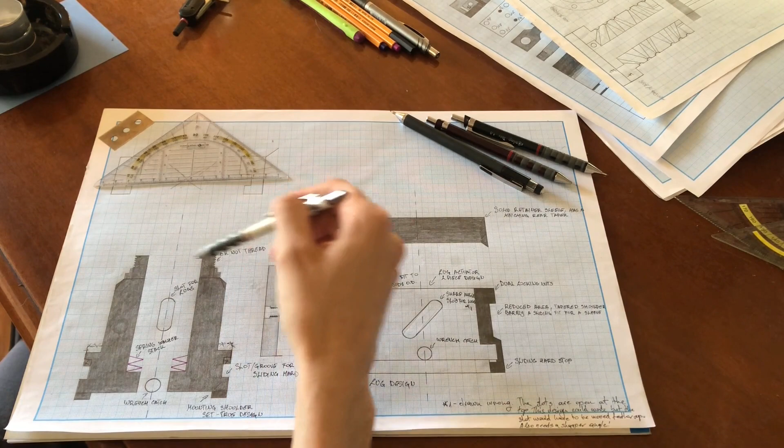Over here, the nut is solely used to exchange the collets, and once you have picked out the collet of the desired diameter that you require for the job at hand, you take the nut, you thread it onto the main body, and you actually break the taper lock and release the forces by actuating this central floating sleeve, or rather a floating cylinder with an appropriate ER collet taper imparted to it via the lugs.

Now, this isn't an optimal technical blueprint, nor is it a blueprint really of any sort, but I suppose it will do the job that I need of it. Disregarding this section, it is a mistake and product of idiocy and of me drawing this whole thing at 4 in the morning rather than at some civilized time when I'm more awake. There are some other mistakes, some of which I have managed to correct, some of which I cannot correct because they are drawn in marker.

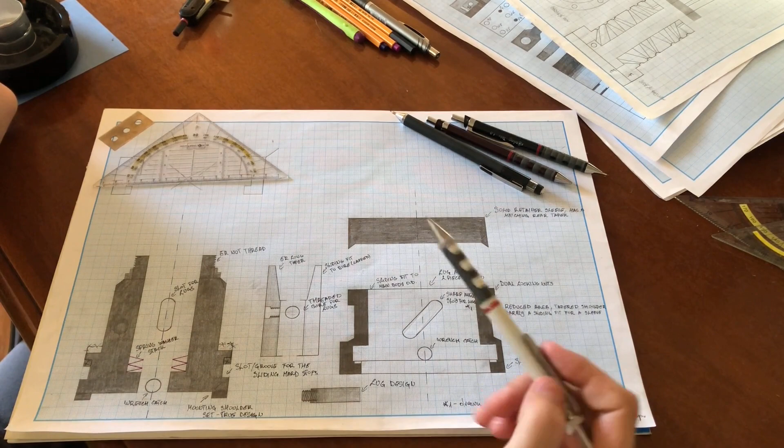To cut the rambling short, the main design, Ollie's prototype, relies on a cylindrical section with a bore for the lugs. Now, I'm not sure really anymore if Ollie's design relies solely on the threaded section of the lug to retain the lug and to support it against the leverage applied to it by the levers, or in my case by the split nut that would be applying the leverage via the angled slot. However, my design changes that.

I'm sorry, I'm going to be going all over the place because this is primarily a video for Ollie, and if you have watched his video, then you pretty much know as much as Ollie does about his design and can thus follow my train of thought.

If the lugs solely rely on the thread as a fixturing point, then all the shearing forces, or rather all the forces that force the cylindrical sleeve down the main body and against the spring washers, are of course going to be trying to shear the lug at the thread section, which is of course the weakest section of the lug itself. Even if you have a thread undercut, it's still the weakest section.

Thus is, I at least believe, a change implemented in a manner where the lug threads into part of the sidewall, the internal section of the sidewall, and it has a cylindrical section in the sidewall that would be bored, because reaming out this short of a section would be more of a challenge than just boring it out. And let's say that this is a cylindrical 10mm section, and let's say that this is an M8 thread.

That means that you have a square shoulder of sorts, a hard shoulder, that can bump up against a hard shoulder over here. Thus would the lug be supported fully by the cylindrical section, and the thread would solely have to pull the lug into the cylindrical support area.

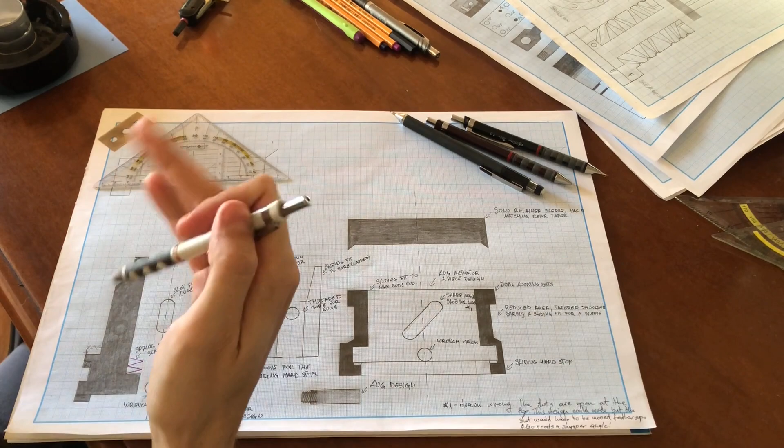This thing is plopped in here with a perfect matching fit that is 1 micron or sub-micron, and relies on a film of high pressure lubricant to provide a bearing for the system and to allow you to actuate the thing itself.

And the thing rests against the spring washer stack naturally until the ER collet nut with a collet is threaded down, and then you should actually first actuate this part down with whatever method you're using and allow the nut to fully seat.

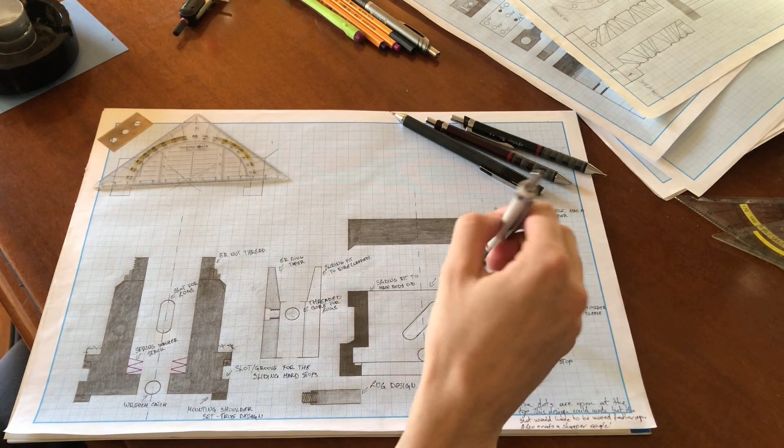Now I believe that this is a modification that Ollie hadn't applied to his design, but I would clock in an ER collet nut on a lathe by the short taper that it has, and I would take a boring bar and would remove the first few threads that the nut has, thus making a cylindrical section. As you can see, this main body has a cylindrical section over here. The idea being that you are no longer relying on threads themselves as a locating mechanism. They are going to be fixturing, but they're not going to be used as a locating mechanism.

The cylindrical portion over here, with a very close tolerance to the cylindrical portion of the nut gained by removal of threads, would actually ensure repeatability and precision of the short nut taper. The nut rear section would also be faced in the single setup, as the threads would be removed to fully seat up and bump up against this square flat shoulder,

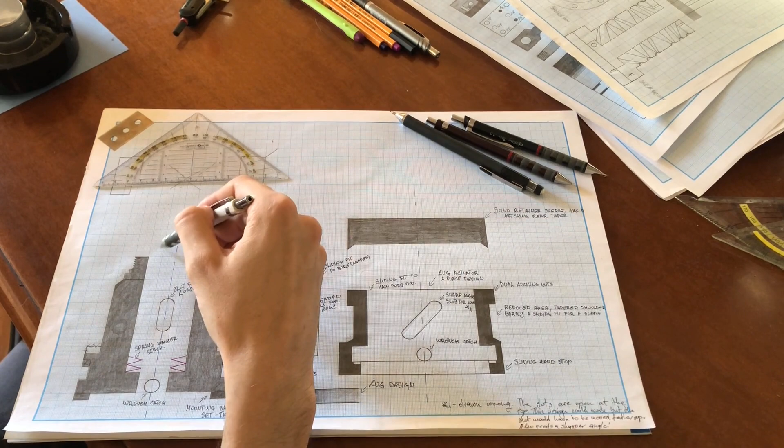which would in turn, with the cylindrical reference surface, act as a dual alignment mechanism, which would thus guarantee the repeatability and high precision of the nut, and would allow the nut's short taper to actually behave as a reference surface, a surface that the collet would repeatably snug up against, by the rear sliding sleeve.

The main body is otherwise a cylindrical section with a shoulder over here. Please disregard this section that I have added with the marker. As said, it was 4 in the morning and I was already losing my shit. And disregard this crossed out section. This actually stays. It shouldn't have been crossed out.

So the main body is a thread for the nut with an alignment geometry over here, just a bit of an aesthetic taper, and an outer diameter that has a perfect fit, also somewhere around 2 micron clearance, with this internal diameter of this multi-piece nut or a ring, however you want to call it, but we'll get to this part a bit later.

It is that way all the way to here, to this shoulder, which is an interlocking section along with this reduced section for this segment of the split nut. This is just a hard stop, essentially, where the split nut would be retained fully in this small section.

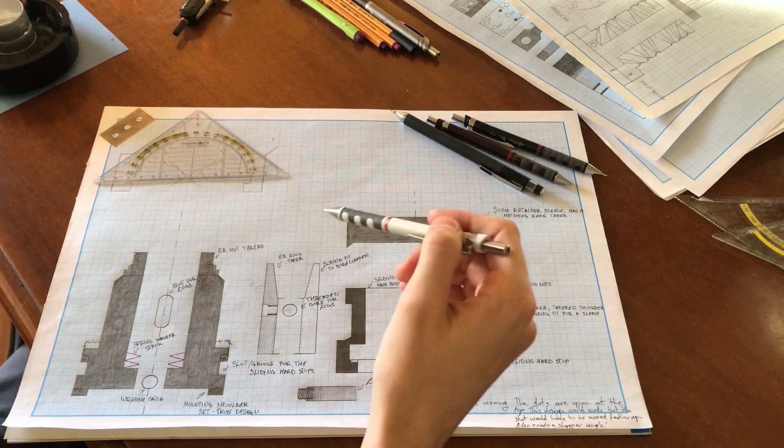With that said, we have gone through this slot, which is actually 2 slots. Everything is mirrored, I hope I said it already, and everything is hardened tool steel ground to essentially sub 2 micron tolerances. Some of them are actually even tighter, being sub micron, other than the slots themselves.

With that said, I have gone through the collet nut changes, through the wrench catch, through this small section of added geometry for this split nut design, potential addition of O-rings and such. The O-rings would be better suited to retain the high pressure lubricant that you would apply to this whole system at assembly or in the service intervals.

So you would add an O-ring over here at the top, you would add an O-ring over here at the base or over here in this section, and that would pretty much retain the high pressure lubricant that would provide a film and a bearing surface for these two parts. The internal section needs no such help because it is supposed to run on a sub-micron tolerance. What little oil or other lubricant is in there would remain in there for long enough between the two intervals.

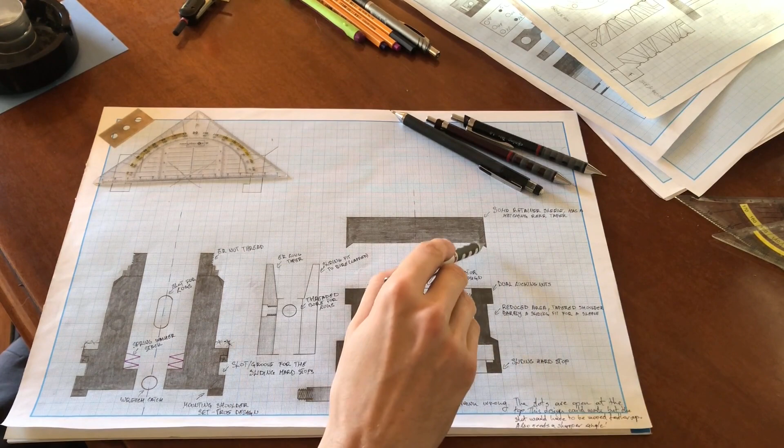This is a split ring, or rather a split nut design. This section is also drawn wrong. This should be missing entirely from here, and this should be a nice, slightly reduced threaded section over here, just as over here. These are actually, as you can see, dual locking nuts. Dual locking nuts for what, you might be asking? For this. This is also drawn wrong, but I wanted to give you an idea that this is a ring actually, rather than having just 2 small, practically one-sided blades drawn over here.

You take a piece of solid material, you slice it in half. I am of course slicing my pencil down the center line, but you would of course not be slicing it down the slot and down the wrench catch. You would be slicing it down the sides in this case, but since there would be no wrench catches and no slots at that time, you get the point. We're talking about rough stock at this point.

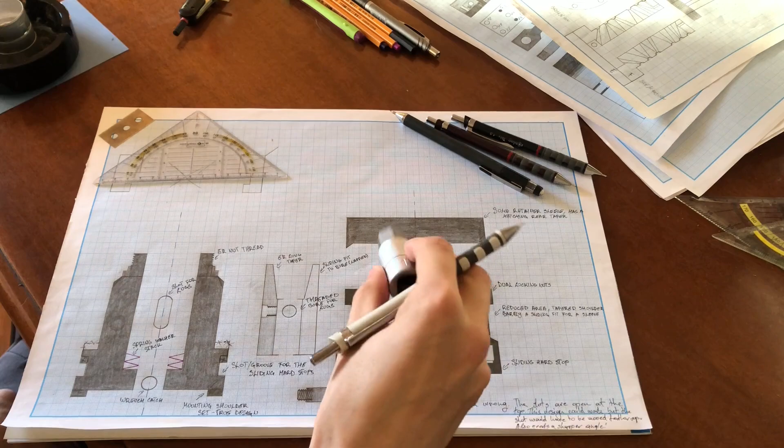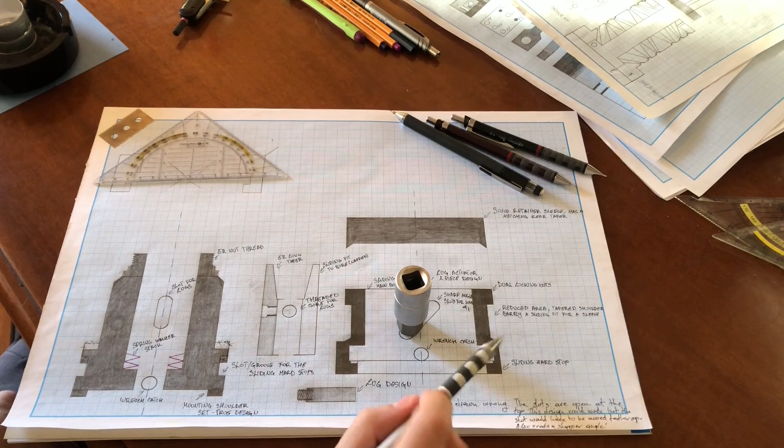You would take a solid piece, rather, let's turn it around. You would slit it, you would clamp it back together. You would of course preferably grind it properly on a surface grinder. You could also take a square section, because that would probably be easier to fixture with a faceplate or with a four-jaw chuck. Some faceplates even have 4 jaws to them, so you can actually rely on a 4-sided piece of material, probably with best odds.

So you would slit it, you would pop it in the lathe, you would bore out the inside. As I said, the inside should be ultimately ground to a 2 micron tolerance with clearance with this outside diameter. You have a reduced section over here, an undercut really, that interlocks around this section. These are going to be 2 parts, so you're going to be able to pop one around, pop the other from below, and apply the retainer ring, thus unifying the whole design.

Now my mind was a bit addled at 4 in the morning, and I have completely omitted the idea that one should actually add maybe a secondary retainer ring in this section, probably with another 2 retainer nuts for it, merely because you have the wrench catch over here and you're gonna be wrenching against it, and this whole section is technically unsupported. The ring bumps up against this tapered shoulder and is in full contact, bearing great contact against this outside diameter. As I said, this is supposed to be a slightly reduced threaded section that the ring can pass over.

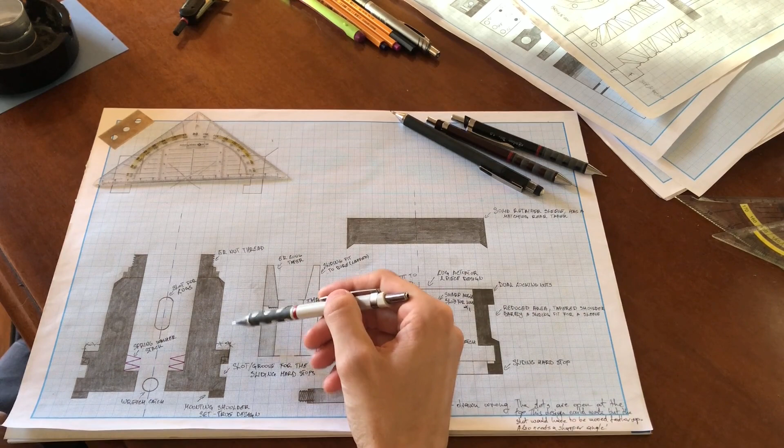That being said, you pop the 2 parts over this. This section interlocks over here, this section interlocks over here, and the whole thing can slightly move back and forth. Slightly. This is not supposed to have 2 millimeters of clearance.

This is supposed to have pretty much 5/10, no more, of clearance, or rather free play back and forth, because you don't really need free play. You just need this part to be able to rotate against this body fully and seamlessly, without any contact. It's not going to rotate fully because it's going to be pinned down and will have limited travel, in a rotary manner, by the lugs.

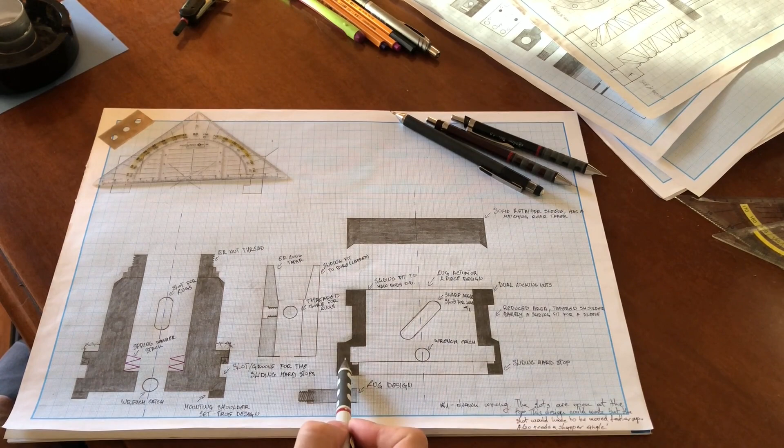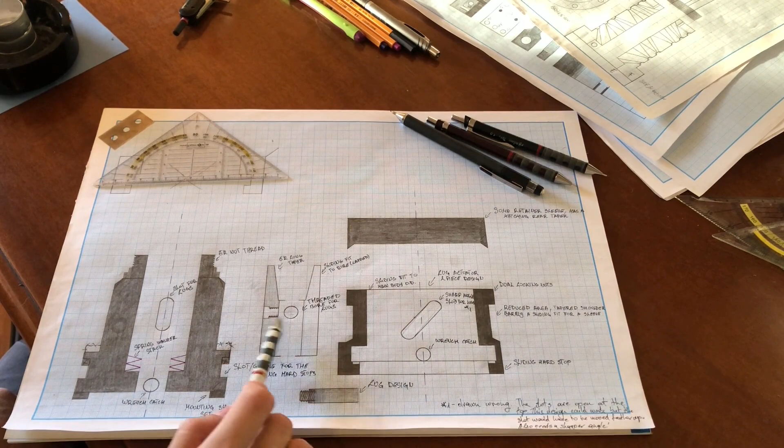This section, as I said, will also have a wrench catch drilled in from the side, which will allow you, in tandem with another wrench catch over here, to actuate this part against the body, forcing the protruding lug to coincide along all 3 slots - the bore, the slot, and the other slot. So with a 15-degree slot rather than 45, it would grant you quite some leverage, plus the wrench leverage you'd already have, allowing you to actuate this central cylinder, breaking the taper lock and relieving the pressure on the stock.

I'm sorry, I'm having a train pass by, so I'm going to shut up for a few seconds. Okay, it's gone by far enough that it's no longer as audible as it was initially.

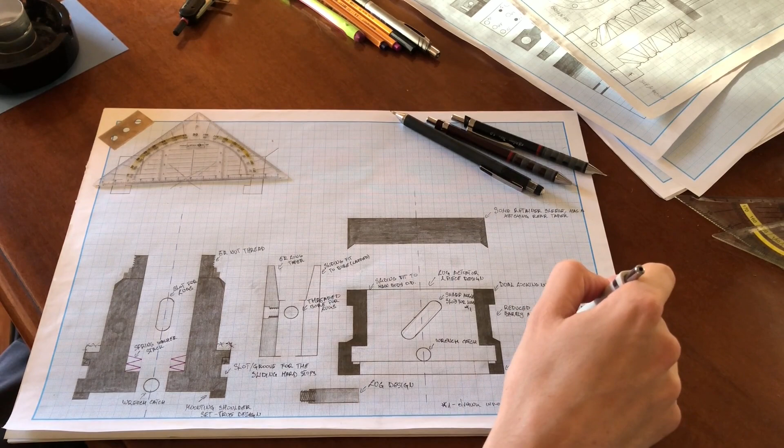Okay, yeah, where did I stop? I've got no idea. We've gone through these parts, we've gone through this essentially, and we've gone through this. Am I really done already? This is the shortest recording out of all of them.

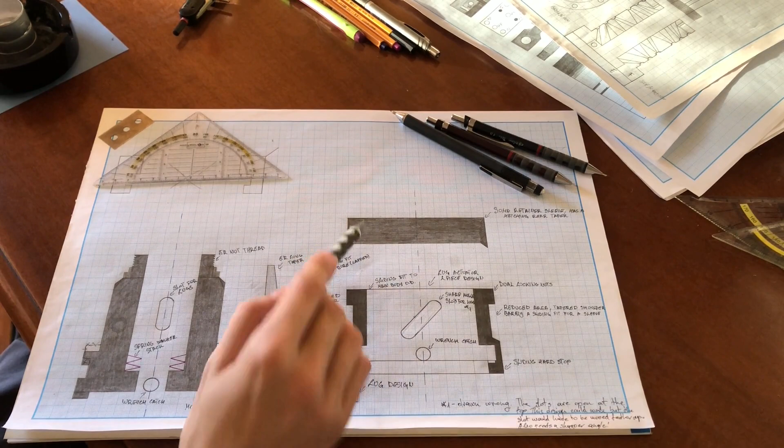I guess the 8th time is the charm, but I'll add some redundancy, or explain it if I haven't already. So this being a 2-piece design, you chuck it up in the lathe, you apply all the turning geometry - the external diameter, the threaded section - you make 2 nuts that are going to retain the sleeve. You add the taper. Of course, the nuts are a completely separate process, but I guess you can follow what I mean. You have some other geometries, the internal reduced sections, the catches, shoulders, whatever.

And you unchuck it from the lathe, you split the 2 parts, you put them on the mill, and you mill in a 15-degree slot over here, and you drill in the wrench catch. That's pretty much how you get this piece, or rather these 2 pieces.

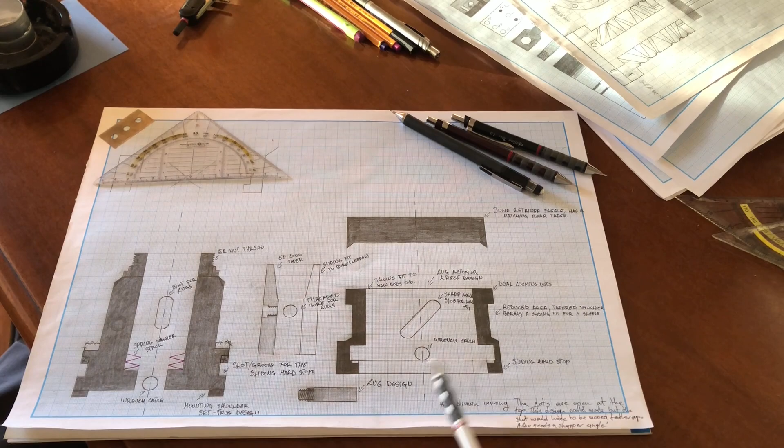You of course do the same thing with the other piece as well, because you have 2 wrench catches. You have 2 lugs, so you want 2 slots, and you really want 2 wrench catches, because you shouldn't add more, being that this is a split design. You want the 2 to be in the middle of the part and to be as supported by the material as possible.

And yeah, I think I've said everything about this ring there is to be said. It's drawn wrongly, but it's a hollow section that has a sliding fit over this, literally sub-micron, purely to properly fit over this. You have 2 nuts that are going to push the ring against the tapered shoulder and fully constrain this whole assembly into a single integral piece.

Another such ring would be quite beneficial in this rear section, but one would have to rely on some very thin nuts, or rather would have to extend this body so as not to obstruct the wrench catch over here.

I haven't said it in this recording. I'm sorry, I'm trying to remember what I've said in this recording and what I've said in the 7 previous recordings that have been scrapped.

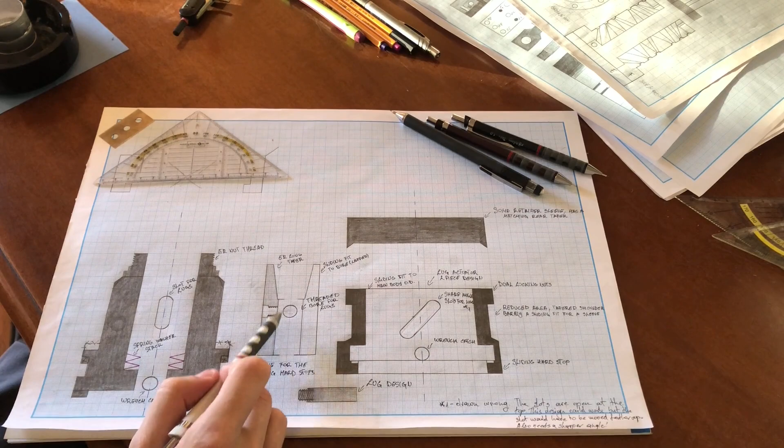When the lug design is fully threaded into this section, the thread does not protrude into the stock feeding bore of the cylinder. The lug has 2 centimeters of length over here that correspond to the sidewall thickness of the main body, which is 2 centimeters.

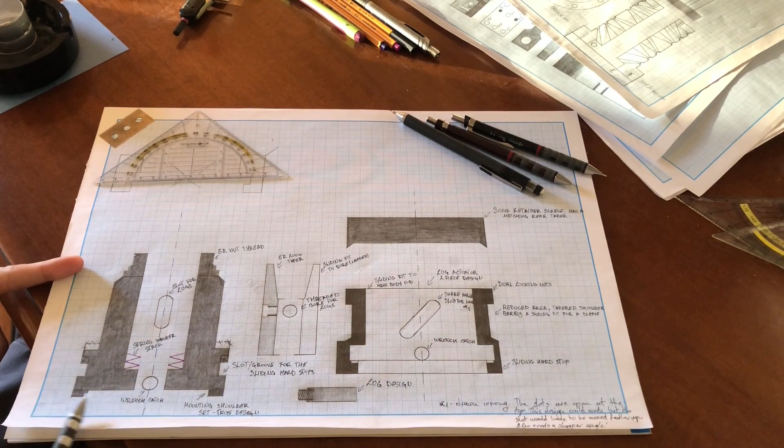I'm talking in centimeters or millimeters, but it doesn't really matter, because I'm purely referring to the millimeter paper. Every single small block is 1 millimeter, and every large block is 1 centimeter. So I'm enumerating dimensions, but those are deceitful dimensions. They are lies, essentially. The paper is producing them.

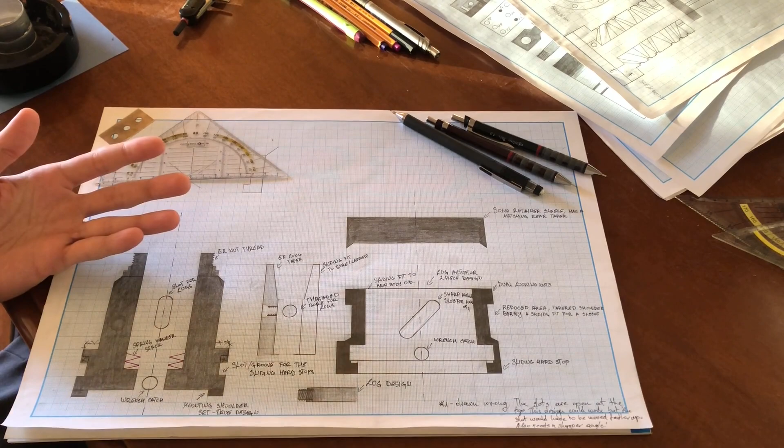I just drew things in a manner that made it easy for me, so the final design is entirely up to you. This is purely a proof of concept, let's put it that way.

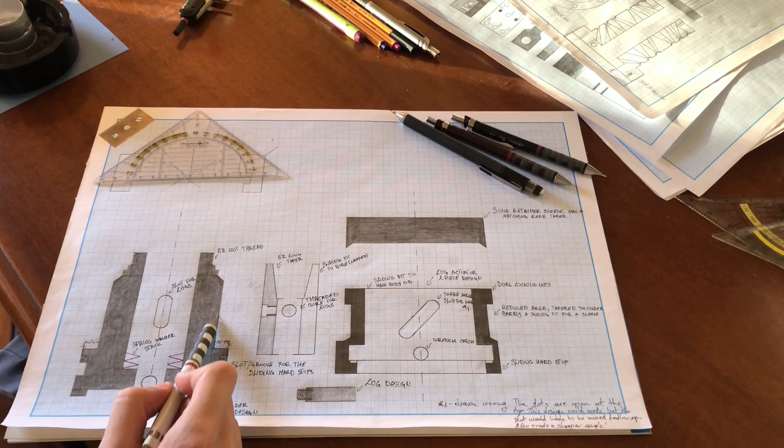But the threads fully engage, the cylindrical section provides support for the lug. This 2 centimeter long section fully protrudes from the slots out of the main body, and then you have a 9 millimeter section with the last millimeter missing, because this section is 1 centimeter wide, and you do not want the lug to protrude from this side wall and interfere with the retainer ring.

And that, I believe, does it. I'm sorry if I'm a bit erratic. As I said, this is the 8th bloody recording.

I actually have an open YouTube Studio window right in front of me, with subtitles being written down for a 32-minute, 56-second video. That is the 7th recording that I wanted to justify and deem passable, because I was getting real pissy yesterday and was about to enter a conniption. But here we are again. I really hope that I'm not going to be having any sound issues, because 5 out of 6 recordings have been scrapped because of some sound issues that are intermittent and that I am unable to diagnose or locate the source of.

So yeah, I'll have to get some better equipment. But to stop the rambling, Ollie, as I said in the comment, I have drawn this.

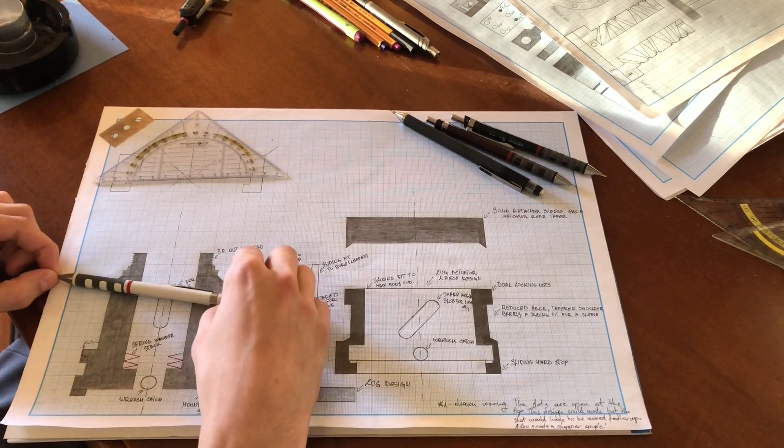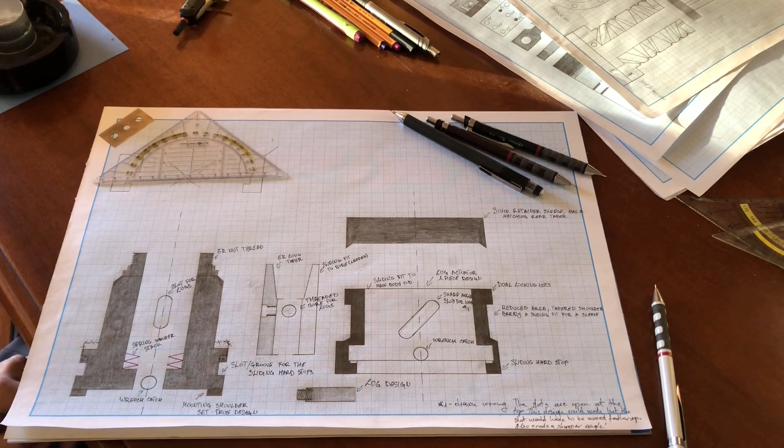I wanted to alleviate the external separate fulcrum for the levers and the levers themselves, because that requires you to affix the separate fulcrum to the headstock or whatever, and I do not really like applying pressure, as you have stated yourself, to parts not designed and intended to be used in that manner. I do not like machine modifications that make use of parts not intended to be used for whatever modification you're applying.

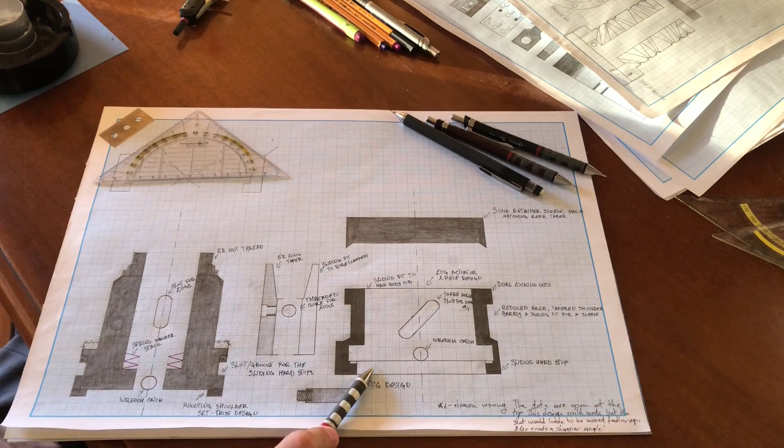I'm aware that this forces one to halt the spindle rotation fully to be able to use it, which this design would have solved, and this would have been a lever actuated design. This piece is quite akin to this piece and would also catch in here, but unfortunately this piece would have to remain stationary because it would have a lever.

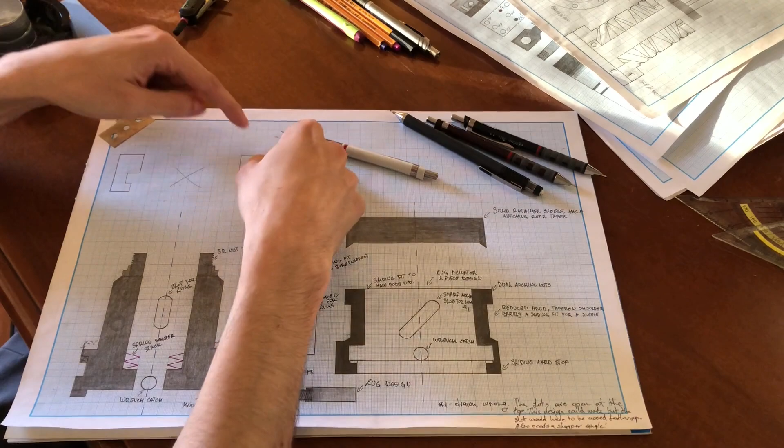This should actually be facing the other way, but given that I'm lacking paper, I've just turned it as I saw fit. It would have a lever, or rather a pair of levers attached over here, and would droop to one side of the ways of the lathe bed.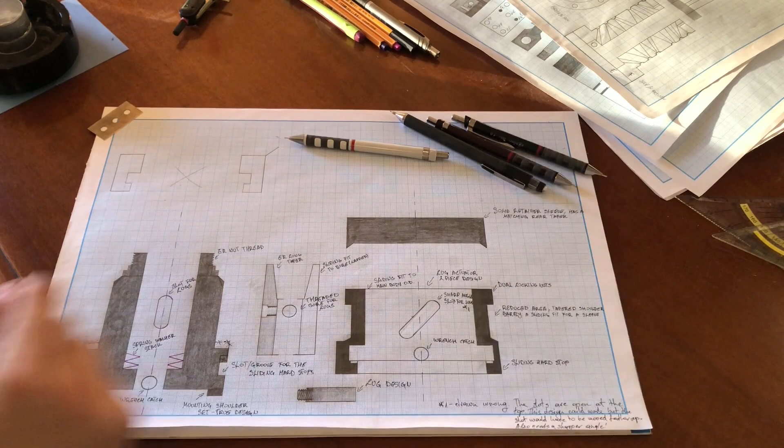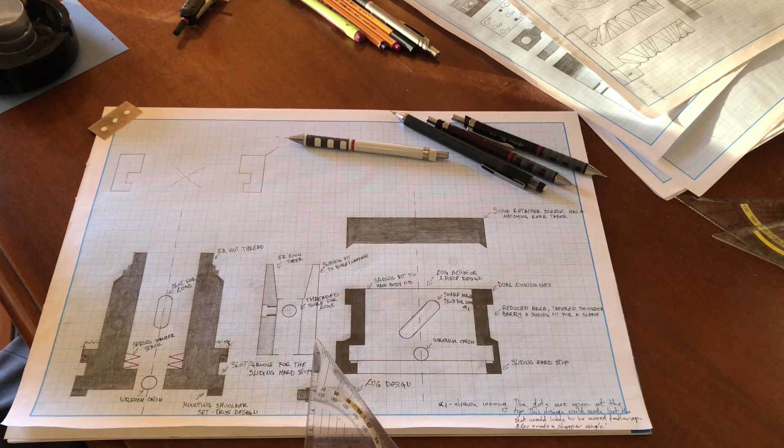So if this is essentially stationary, this has to turn within it. You would have to have a bearing solution of sorts, merely to be able to have this part running in this section, and that would be a more complicated, more annoying design to implement.

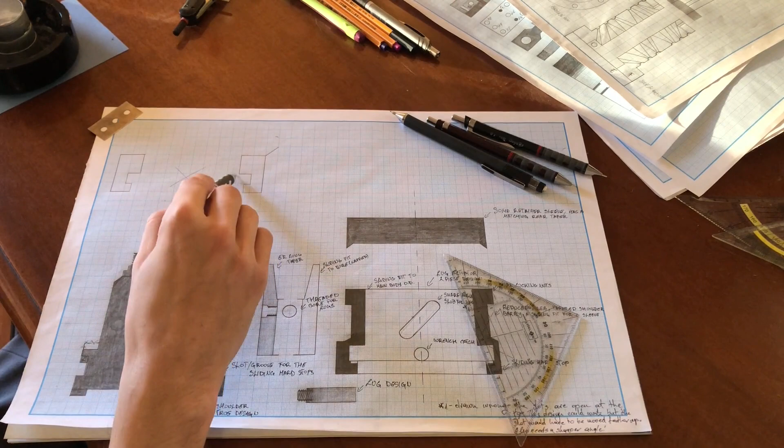I suppose one could do it relatively easily by splitting it over here, making an interlocking geometry, applying another retainer ring over here, relying on certain bearings applied within this section. You would have to modify this part a bit purely to insert the bearings, but it would be a bitch. It would just be adding unnecessary wear components nonsense.

You could even rely on a 2-piece bronze journal bearing, but then you would have to oil it constantly, because journal bearings aren't bearings, they are another deception in the form of a bearing, because they bear actually nothing. The oil, or rather the hydrodynamic film, is actually what supplies the bearing.

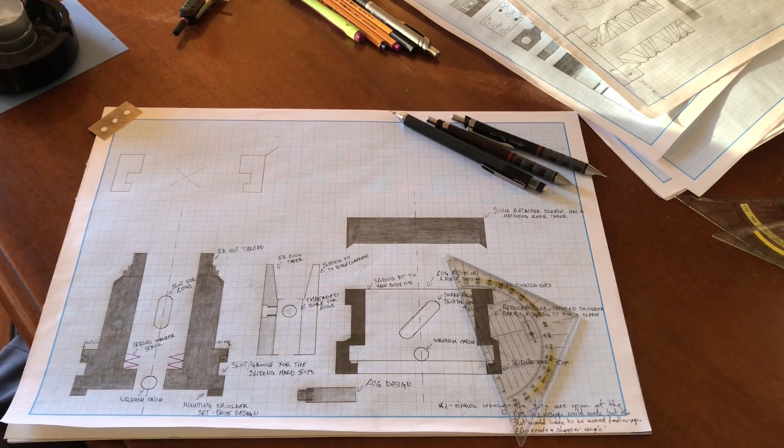So yeah, I'll stop rambling. As I said, this is completely disregardable. I hope you ignore it and forget about me rambling these few seconds.

That all being said, I'm glad that I have filmed this, and I will actually be glad that I have filmed this if this video isn't going to be plagued by sound issues. But yeah, that'll do it for this video.